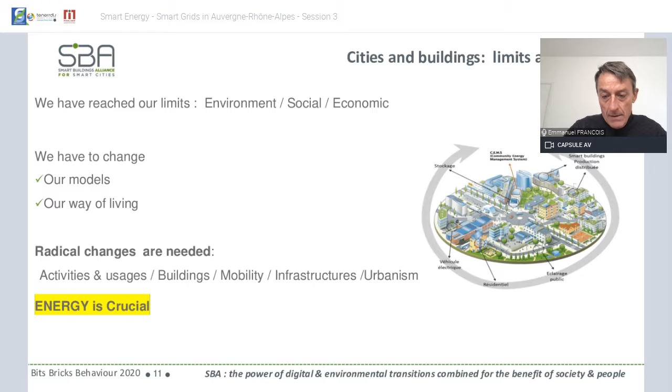In this context, digital is very important and is an opportunity. We are noticing that more and more we are going to a hyper-connected world, where every citizen, every building, every mobility, every territory, equipment, infrastructure are connected. But not only connected - interacting with each other in real time. That's the most important thing, this qualification of real time.

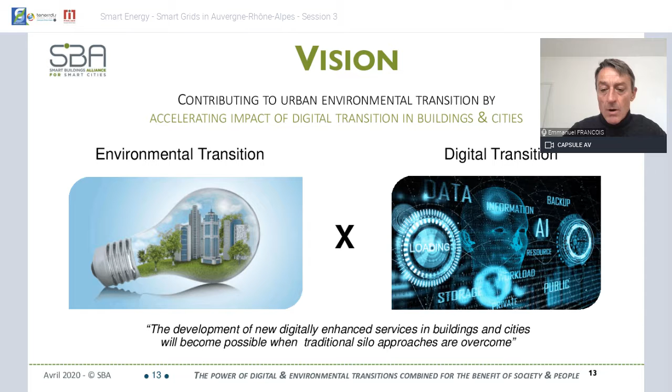Our vision is to support this digital transition and environmental transition. Therefore, we founded SBA as a think tank and also as a do tank. Today, this organization, I would say, is almost unique in the world for its transversality, and groups around 500 members in France. Within these 500 members, already 10% are non-resident in France, so that means our ideas, what we are doing, is going abroad our borders. We group cities, architects, installers, equipment providers, telecom, IT, financial industry, industrial players.

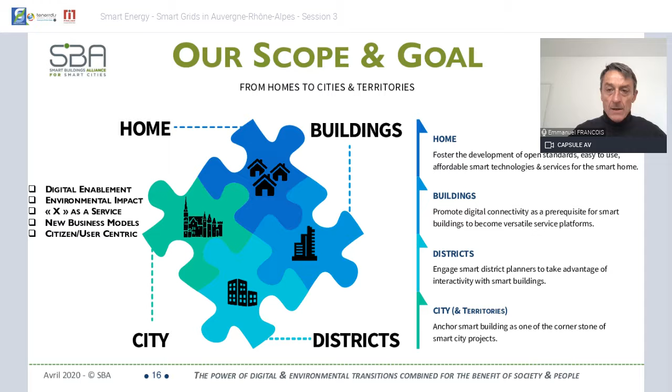So all these players are sitting together to rethink the building and the city of tomorrow. Our scope concerns not only homes and buildings, but also districts and cities, and how everything is interacting together, and how we can rethink a better world by rethinking the buildings and the cities.

To support this transition, we have a strong organization with three vice presidents - one for smart city, one for smart building, one for smart home - and general secretaries, and also a management office and a board of directors. Some attendants today are also members of this board of directors, such as Frank Fischer.

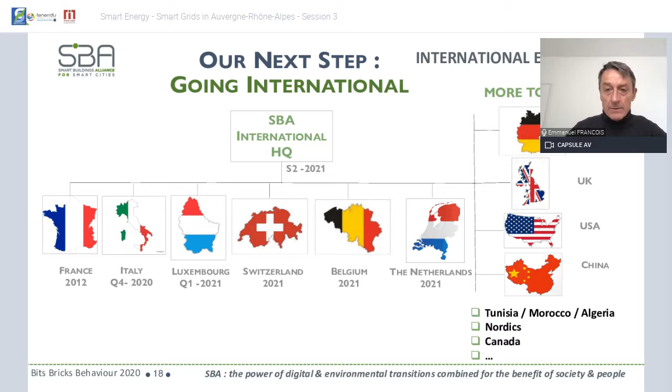Our next step for the coming years, starting this year, is to develop SBA internationally. SBA is a non-profit organization with a unique common interest target. We think it can be interesting to exchange with other countries and to set up independent SBA chapters in every country, and then eventually create an SBA International, sovereign of every smart building initiative, even in France, which will group the thoughts coming from every country and support the framework we worked on, which could become a universal framework for smart buildings and smart cities.

This is our thought. So what are the main works of SBA? First, just to recall, we wrote 10 recommendations, smart and green, last year for all the players and stakeholders, on how to make a smart building, how to make a smart city, how to start, and which recommendations to follow. It's very simple, but that's what we did, and it's available in French and English.

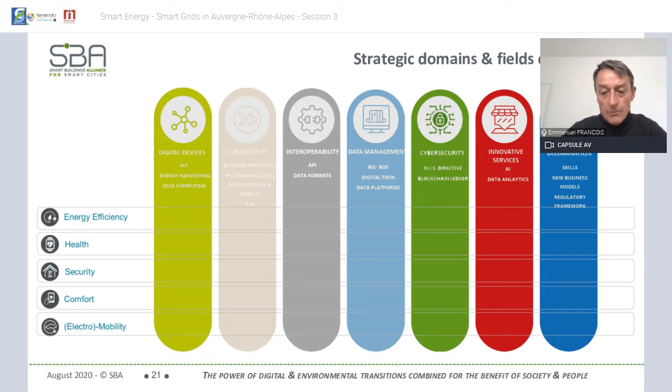Beyond that, the works and goals of SBA deal with energy efficiency, health, security, comfort, and electromobility. For all these fields, we deal with digital devices, connectivity, interoperability, data management, cybersecurity, innovative services, and dissemination — how we can train all the people and stakeholders to support this mutation, this transition, which I call a civilization transition. For this, we have set up working groups and commissions, first working on the reference framework.

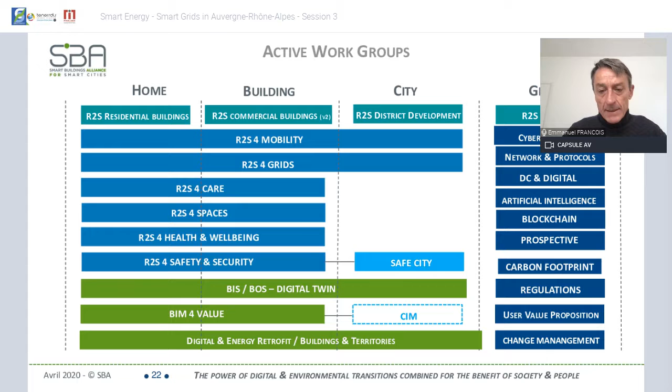The most important is Ready to Services, which we'll talk about later. We also work on the digital twin of buildings and cities, the operating system of the smart building and smart city. Also, how we can retrofit existing buildings and territories by bringing in digital elements, and transversal commissions such as cybersecurity, networks, DC and digital, artificial intelligence, blockchain, prospective studies, carbon footprint of digital, and regulation — because it's very important that the law supports this mutation and adapts itself, that regulations adapt themselves, along with user value proposition and change management.

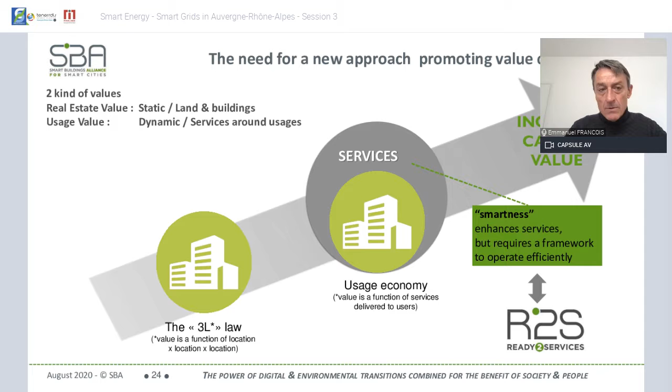As I told you, we are at the origin of a reference framework called Ready to Services, R2S. Why Ready to Service? Because we mean that with smart, with digital, there is a new value to consider in the building and also in the territories — this is a usage value. Beside the real estate value, which is static and concerns lands and buildings, you have a usage value, very dynamic, linked to the ability of the building and territories to deliver new services around usages. This means a new economy to adapt, and it means we need to rethink the rules and regulations around these dynamic usages, and how to consider and evaluate this value.

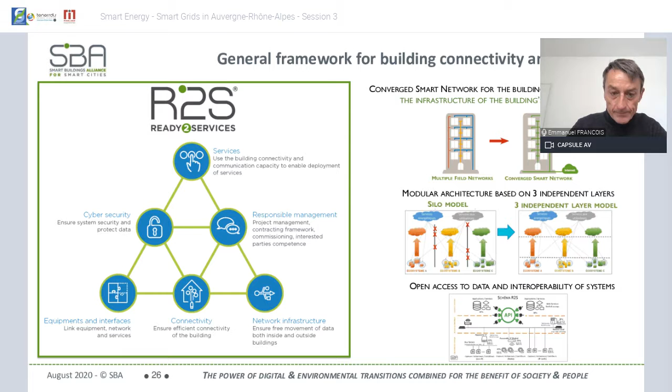This Ready to Service framework is now also supported by Ready to Service R2S Connect, where we describe, as I said, the APIs.

Just for your understanding, because maybe it's a little abstract, take into consideration a residential building. Today you have your own internet access, contracting with a telecom operator. That's what we respect. But now there is a new network, a network of the building, the digital IP network of the building, and this is independent of your network.

This network supports all the applications concerning the building and residential homes for crucial applications such as energy, water, gas, security, and assisted living. This belongs to the building, so you can pool all the consumption of the building in terms of water and energy, also collect the data of all users, and integrate the building into a smart district, which you cannot do if you have separate housing with separate data and separate operators.

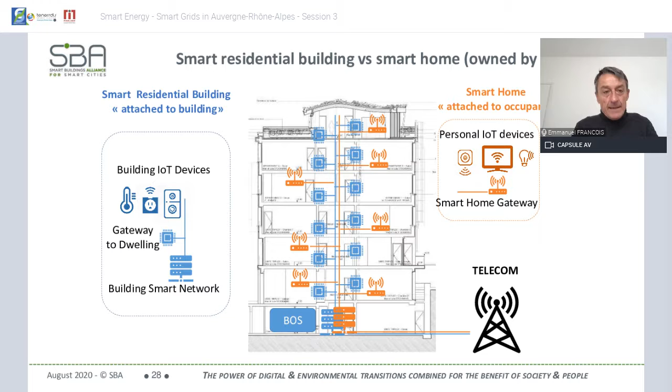So what I'm saying here is quite important and also quite disruptive. But today, as I mentioned, we already have 500 members who are supporting this mutation, and we said yes, we have to do it. Now let's do it together.

Ready to Service concerns not only residential buildings, but also commercial buildings and district development. This is, as I said, a reference framework to be applied at every scale. I would say this is a digital trust framework. And of course it exists, but it can always be improved.

At this occasion, we are already working on a V2, which will be launched this year. That's the reason why we want to share today and tomorrow with you, with other countries, in order to improve this framework so that we can be as efficient and secure as possible, so that the management of the data becomes more and more secured, and so as to ensure trust, not only for the players, but also for the users.

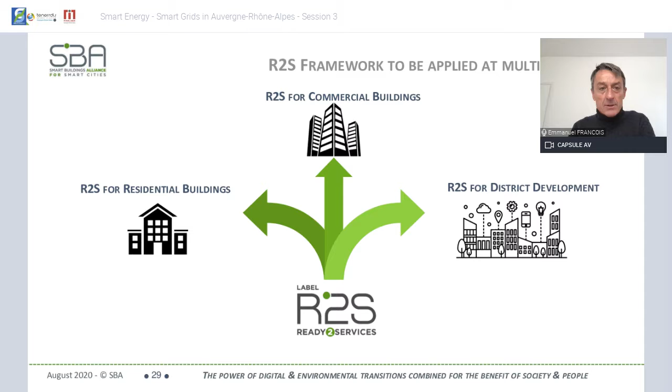When I say services, this is why we say Ready to Service, because there are services. And these services exist. Today we have listed several services which are key for the building, key for territories. We started with energy services, and for this reason we launched last year Ready to Service for Grids.

This is a declination of the Ready to Service framework, which concerns especially the data concerning energy and how a building inserts itself in a smart grid. Very soon we will launch R2S for mobility for the energy part, to describe how an electrical vehicle can connect itself to a smart building and how we can manage the charging point.

But we are also working on R2S for spaces, for optimization of spaces. That means a space in a building has to be mutualized, pooled within all the buildings and also within a district. The same for safety, health, assisted living, personal care. And also recently we will work on signage and user well-being, and so on.

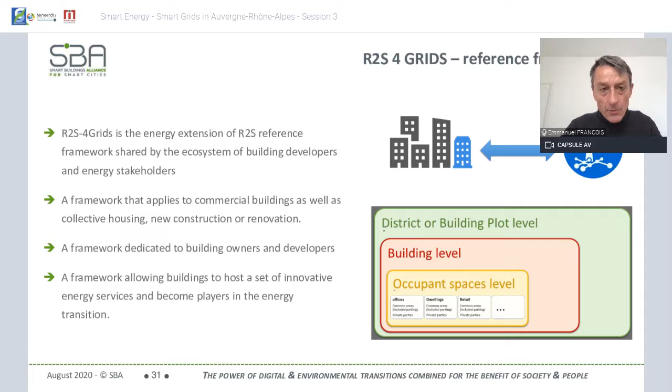So, Ready to Service for Grids. I will switch very rapidly, but what is important is we have described three levels of the building. The first level is how the building is connected and shares data with its environment and how we receive the consumption information. The second is how a building is reliable, meaning how the energy production and consumption data are reliable and stick to objectives. The third is active buildings, meaning how this building interacts with a smart district, with a smart grid.

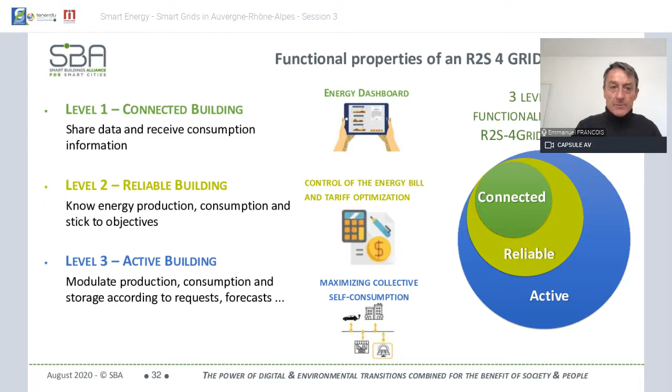Recently, as I told you, we will launch ready-to-service for mobility. This goes the same way with data management, cybersecurity, and quality management system.

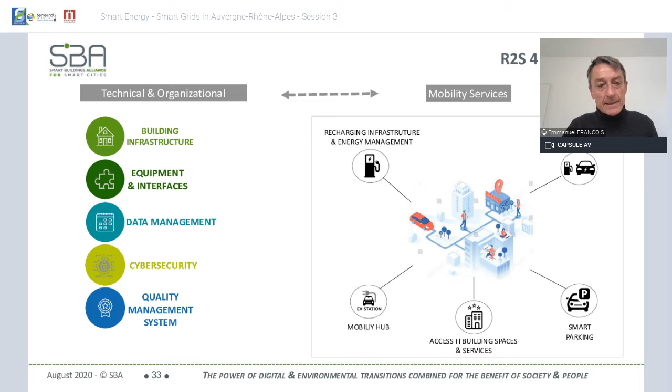And what is quite important, we are launching a new concept, which is EV score, electrical vehicle score. That means how a smart building can integrate the electrical vehicle and be able to manage the charging of this vehicle. So just as description, we have A, which means how this building can adapt and accept vehicle to grid, meaning how the electrical vehicles become a real component of the smart grids.

But already with B, it's very interesting. That means how a smart building can monitor systems connected to network and how we can adjust the electrical consumption of the electrical vehicle to the global needs of the building.

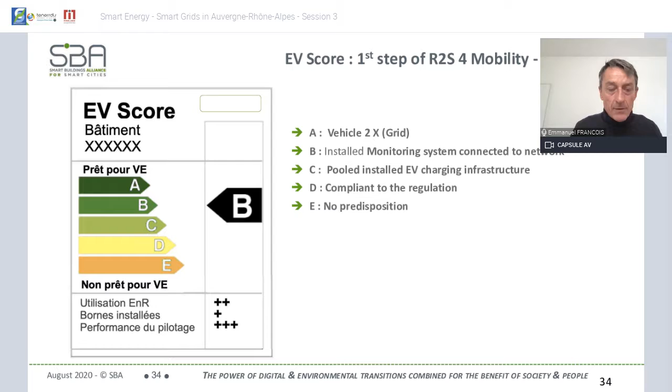Which is quite important, and our target is at the end to describe the digital twin with convergence between the static data of the building and the dynamic data of the building, to have a global overview in real time of the building and the district for all the services.

I will sweep very quickly, but this was also a topic I wanted to highlight because the topic of today is energy, and I have the conviction that we need to go to hybrid networks for every network, and I would say more hybrid equipment, hybrid building. So let's start with networks.

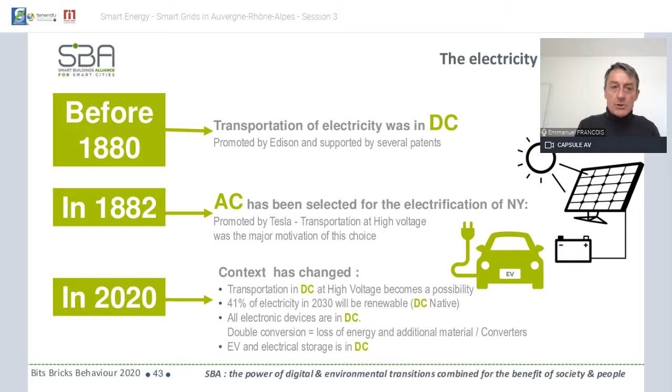And if we want to answer the current challenges in terms of climate, in terms of GES, I think switching to DC is not a utopia. It's just a need, and we need to have it in plan for the next 10 years.

And as you see, hybrid AC-DC electrical networks is already a concept emerging in the heads of several countries, in the head of several universities, as in Netherlands, the University of Delft. But what I think, and I spoke about it to the European Commission, is that it's time now to have a European plan for how we can progressively switch to DC - that means to have a hybrid AC-DC electrical distribution, especially with digitalization.

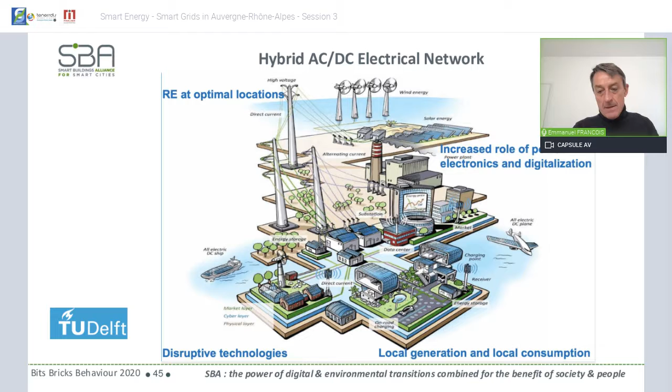That means as we are deploying digital in every building and every territory, at the same time we need to deploy also this DC network. So that's my vision I wanted to share at this occasion, and I hope you will receive it positively.

And just to highlight it, my vision is not only energy but also water. As you know, today there is a huge problem with water, and in the next 10 years we will have everywhere in Europe problems with water. And as you know, only 10% of the water we are using is for drinking, we need to also rethink the water networks and have a hybrid network - one for water we drink and another one for usage water. And the same also for waste.

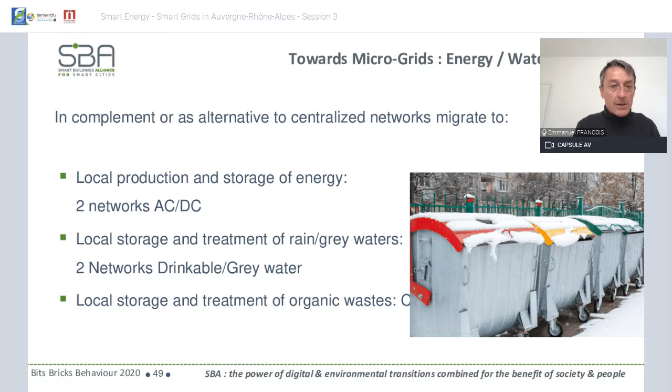We need to have a local store and a local treatment of some wastes. So I think this is a new way of living, and we can provide this just because we are sharing data, and this data we are collecting locally, and then we have a local governance of these hybrid networks we can manage locally for more efficiency. This is a vision I wanted to share with you, and now I would like to answer your questions very rapidly. But this vision is just to move to more sustainable territories, with more diversity, more proximity, and more frugality. Thank you.

Thank you, Emmanuel, for your presentation, which went from electrical network to a much broader range of topics, including water and waste. I see that you are looking at all the aspects of a smart city, not only energy.

We had one question in the chat: Is the reference architecture documentation available? Yes. Maybe you can send a link to where people can access this information, I guess on your website? Yes, on our website, and also on the website for smart building. You can find it also on the website of Certivea. If you can write it on the chat later. Yes, I will do it, no problem.

Okay, another question from Frédéric Lux: Which services are you offering your members? Our members, the services, yeah, the 500 members you mentioned, I guess.

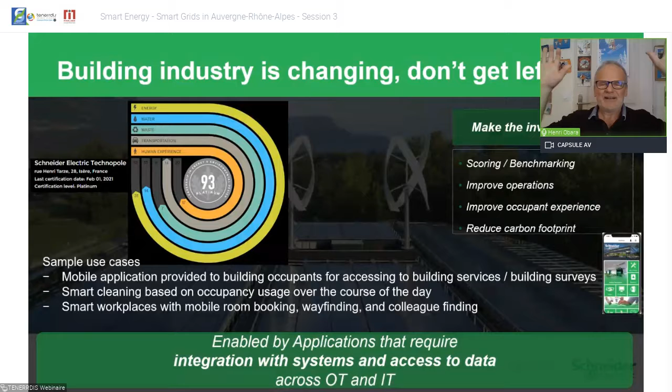More specifically nowadays with COVID, but in normal situations we still spend 90% of our time in that building. Whoops, not so quickly please Quentin, can you go back to the previous slide? Yes, thank you.

So what we call today within Schneider building of the future is that we have the vision of an all digital and all electrical world, and this will be applied to our building offers and solutions. This is enabled today thanks to the convergence and integration, as mentioned many times by Emmanuel, between IT and OT. Next slide please, now.

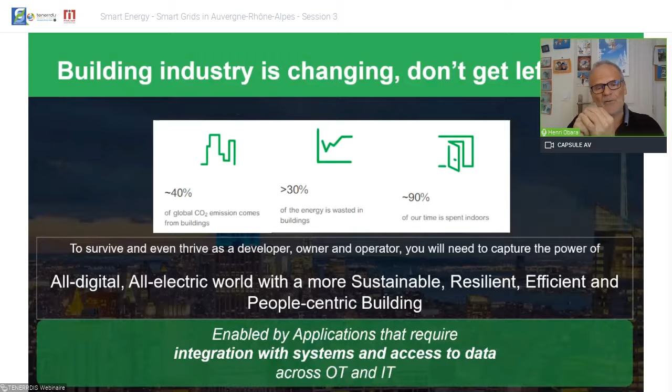What can we think and how can we do that? We learned many things today from Emmanuel's presentation about electrification, DCs that are coming up and showing up, but also when buildings are in fact constructed and start the operation phase. That's where the effort must be sustained to reduce the impact. How can we do that?

We do that by managing energy, of course that's the premium impact of a building's consumption. But not only energy - buildings consume water and generate waste. And also, to go to the building, and that's another dimension of a building, transportation shall be addressed. Also together with city planners and city transportation organizations, we should think of new ways of mobility.

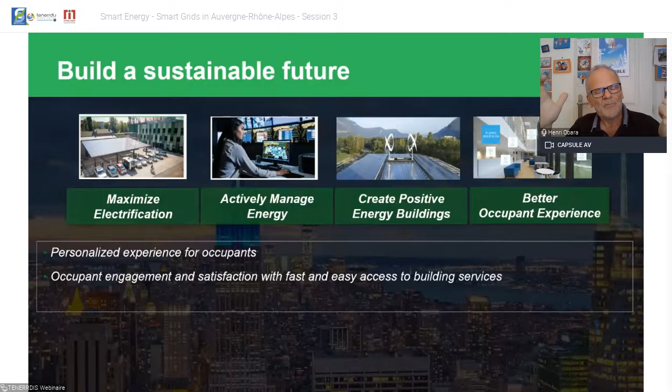So today we will address all of these topics in one single vision, and I guess some of you know what I'll be referring to as what could be the result of a smart building - that means how can we make building efficiency and building environmental performance visible. Please, the next slide.

This is one of the ways we chose for at least our two buildings in Grenoble - we'll see those buildings later on. On the left side of the slide you see a kind of racetrack, as the Americans call it. This was the accomplishment of Schneider Technopole building, which is not far from the Tenerrdis location. What you see is that the building achieved a very high level of performance according to this well-known international rating system, which is LEED.

What's that meaning around? Not only did we make the building's data visible and accessible, but also we can demonstrate, benchmark, score, and improve the whole building portfolio worldwide, and rank that building according to a rating system. We chose the LEED approach because to date these are the only ones that allow and provide a scoring function based on data sharing. And this is the story I'll be telling you in detail later on.

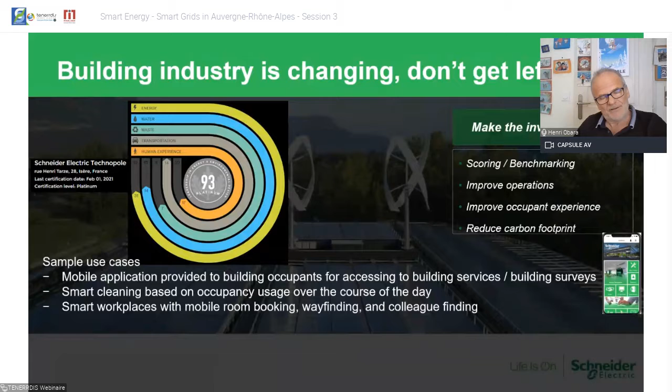Next slide please. That's the Technopole building, as you can discover it when you come to Grenoble by train - you'll be able to identify it very easily. It's showing its PV facade, which might be quite a strange way to install PV, because PV on the facade isn't that efficient.

But still, these two facades - the south facade and the southwest facade - you might imagine are not producing that much energy, and you'd be right. It's more an architectural touch around the building. But still, these facades generate a small share of the energy consumed by that building.

So what was the achievement? What was the project about? How did we start that? We started, since we were the owner of these buildings - Technopole campus is a set of different buildings - we started a project from scratch, located on this campus where there was demolition ongoing to prepare the field for constructing these two buildings, the lab part and the office part.

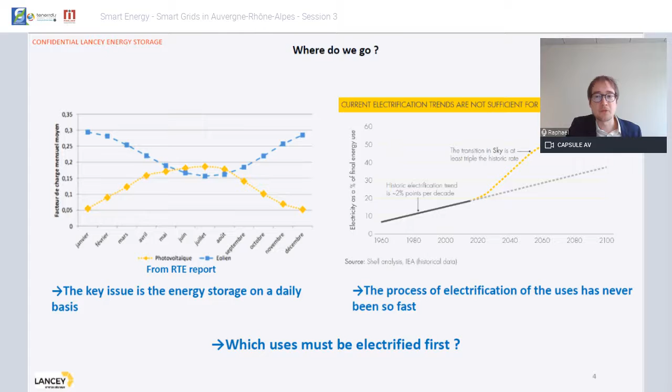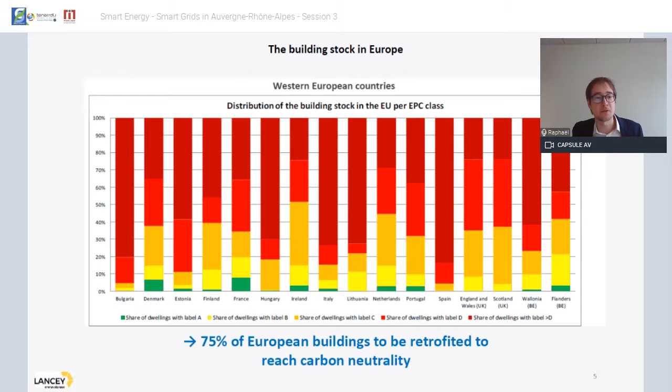So that shows you a bit the scale of the retrofit to be led in the coming decades in Europe, to put those dwellings in the right category. France actually is not that bad in terms of label A, we're actually number one or number two in Europe. But the problem is not the new buildings, the problem is really the retrofit. You can probably imagine thousands of billions of euros to be invested into those retrofit operations, and the key aspect will be about user acceptance.

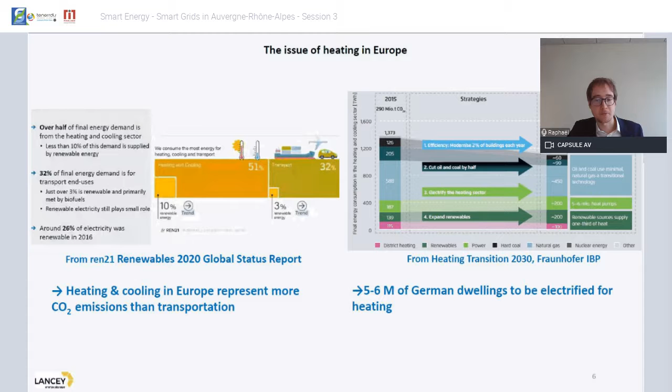So probably at this stage you know my point: we have to electrify the heating, and we have to do it in a way that creates resilience for the end users. We have this yellow jacket effect that's pretty well known right now - if you don't provide the right transitions and the possibility for people to adapt to change, for instance regulation regarding carbon taxes, that was the initiation of the yellow jacket process. You can imagine plenty of those bad side effects where people will prefer to refuse or even deny the change rather than follow the move. So it's not easy at all, of course not.

But it means we have to consider, we have to have in mind different kinds of options to adapt to the wide varieties of those buildings to be retrofitted in Europe. And at Lancey, we have developed a product that, in our mind, can be very, very performing for at least one part of the use cases of individual dwellings to be retrofitted.

You have only 5 minutes left, Raphael. Wow, okay, I will accelerate a bit. Sorry for that, too long for the introduction.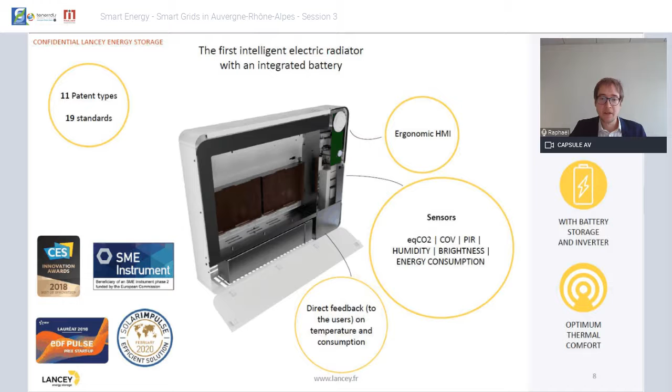What we imagine with this product is that kind of configuration. So it's not only the Lancey Capella, our heating system alone - it's infrastructure, a complete solution with different of those systems, with a link to the smart meter that we've been working on since 2018 directly with Tenerrdis, and of course the PV photovoltaics installation on the rooftop or in the neighborhood.

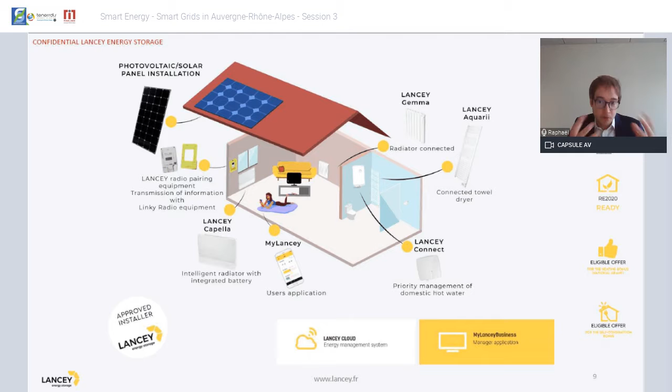Imagining the same single solution in self-consumption, with as much as possible local production and local consumption through the storage capacity of our devices, with a view to having it run efficiently to reduce the heating bill first, to create more resiliency for the end users, to reduce carbon emissions, and to open new kinds of services like grid services, demand response, frequency containment reserve. I will come back on that.

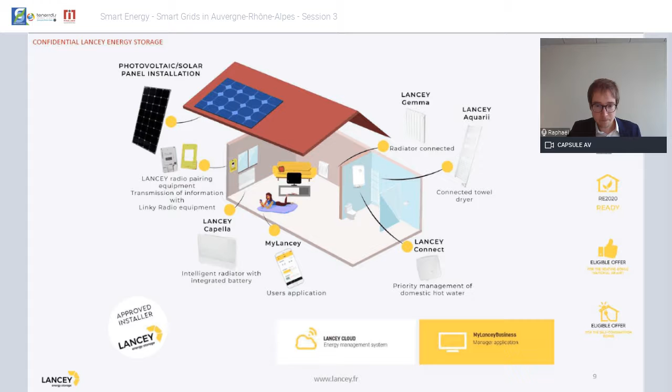We have developed the full package of application. You have the front-end part with the end-user app, but you also have a back-end part which deals with model predictive control on different aspects. The idea is to have the opportunity of treating different layers of constraints, some coming directly from the house, from the end user, in order to fulfill the level of comfort, for instance.

But some constraints can be completely external to the dwellings, like the constraints from the grid, the weather forecast, the availability of renewables in the coming hours or days, the CO2 emissions, and why not, in the near future, some constraints coming from an energy community with other sources of production and consumption.

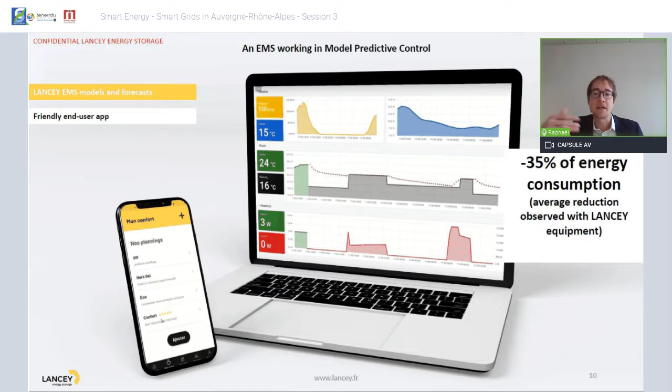The main part at day one is to be very efficient regarding the heating generation, which is a main source of CO2 emissions and of the heating bill at the end of the day. But that also makes a system that can be adapted over the years to changes of regulation and to more and more complexity, and that's the end goal part of the smart grid.

One thing to have in mind regarding the Lancey approach to storage, which of course can be duplicated to other kinds of uses, is the fact that normally in a traditional storage system you have the battery pack itself, but also different parts around it which we call the balance of plant. A battery by itself is DC, low voltage, you can't do much with that directly. You have to use an inverter to control temperature, to make an energy and battery management system, etc.

That costs quite a lot, actually up to 50% of the total cost of storage. And that's even more the case considering a behind-the-meter approach, like Lancey is. If you embed the battery directly into the final use, you reduce those associated costs with the storage.

And typically, you can find the same kind of advantages with the electric vehicle to grid approach, and that can be interesting to reduce the levelized cost of storage. That's clearly one advantage of the Lancey approach.

One other advantage of this approach is the fact that, considering rather small batteries, we can consider different kinds of sources to imagine a second life of batteries quite easily. As an example, we are working with the largest fleet of e-bikes in rental services around Paris, Véligo Location - it's 20,500 bikes. Lancey is collecting the batteries after their first life in the bike.

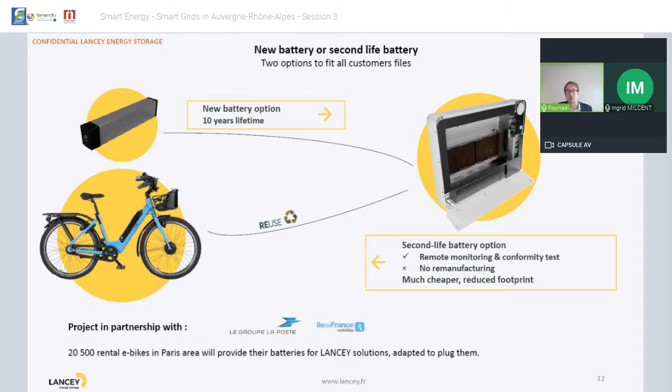After some tests, we select the best of them to find a second life, without remanufacturing, into stationary use. That's also an interesting contribution we can provide as stationary storage solutions to support circular approaches, and part of the solution to the issues that batteries, like many renewables, can have - the raw materials consumption and all those rare materials we have to use for the moment.

Sorry, Raphael, can you wrap up please? Yes, that's my final slide, and then I'm finished. Sorry for that.

Clearly, what we want to participate in and are looking for partners to collaborate with is imagining the step further, where we can go above the single house or single flat, onto a larger scale - like a group of dwellings, a group of buildings in a collective self-consumption configuration, or an energy community - imagining that we can create additional resilience and additional value to local production of electricity with more sources and more possibilities of consumption on site, and how it can be both profitable, scalable, and carbon neutral.

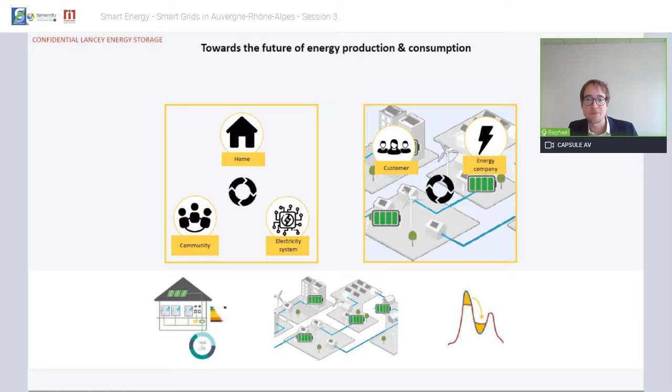And clearly, if you, dear audience, have some interest in joining our conversation, you're most welcome. Thanks a lot, I was a bit too long, sorry for that. Don't know if you have some questions.

Thank you, Raphael. There was indeed one question in the chat, so we will show it now.

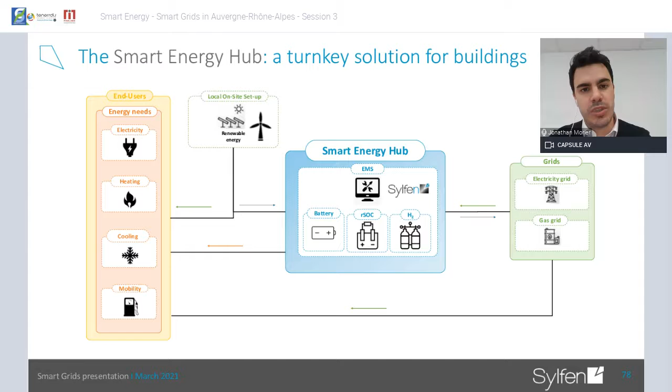As I mentioned, the heart of the Smart Energy Hub is this reversible solid oxide cell. For those who don't know, it is basically a 2-in-1 electrolyzer and fuel cell. So those are two different modes.

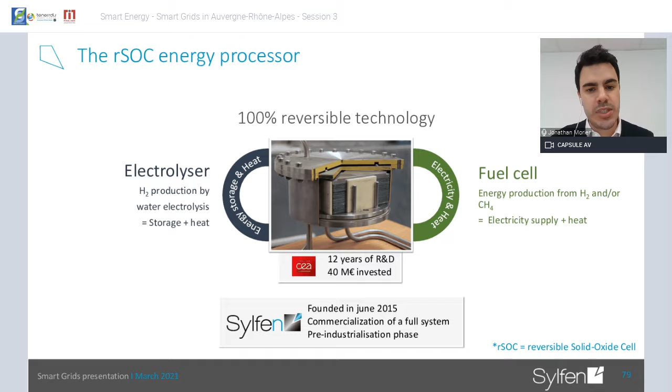Whenever the hub is in electrolyzer mode, it will absorb the surplus electricity that is being produced and convert that into the production of hydrogen. In the other way, whenever it is in fuel cell mode, we have the consumption of that hydrogen that has been produced, and that is being converted into electricity and heat. The idea is to provide that energy back to the building.

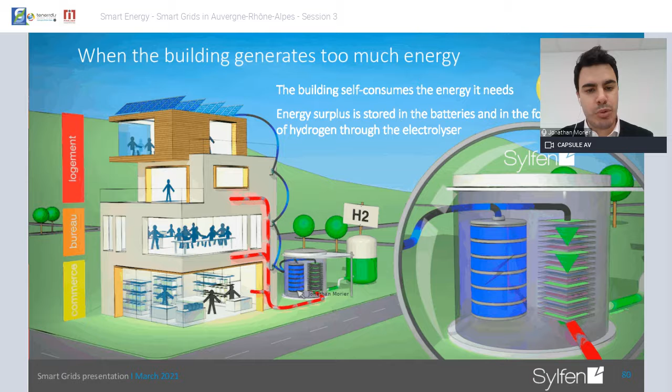In a nutshell, in a diagram, you have a building which has some source of renewable energy production. The solar panels will provide much of the electricity for the building, and whatever is not consumed right away will go into this Smart Energy Hub, which is made up of the batteries we represented in blue, and then that energy processor in green.

That's whenever during the day, whenever there is surplus and whenever there is not enough energy, that Smart Energy Hub will give back that energy in the form of electricity and heat.

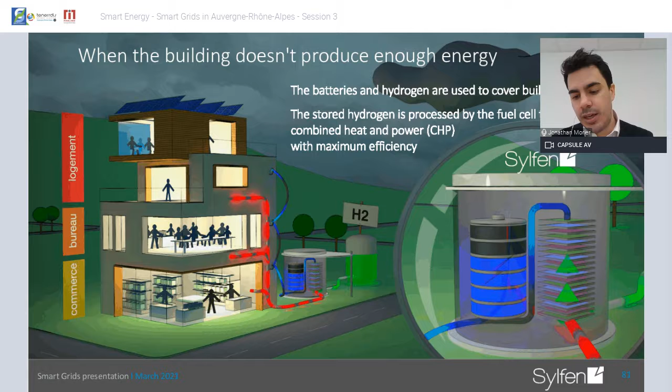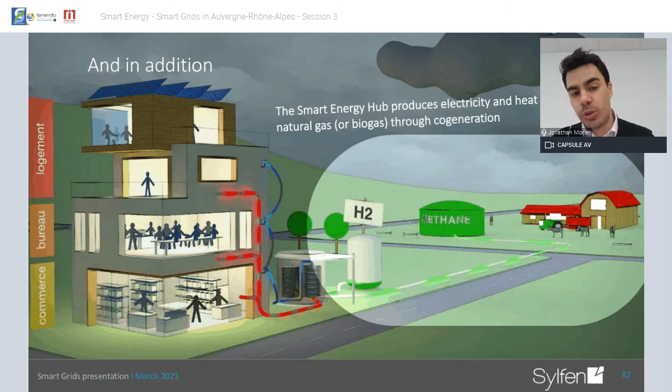One of the particularities of our technology is that whenever the stocks of hydrogen are completely depleted, we always have the possibility of running our Smart Energy Hub as a fuel cell and cogeneration using natural gas. If we can use biogas, that's even better because we obviously reduce the emissions. But the point here is that we are able to increase flexibility whenever there is not enough solar production, for example, to produce enough hydrogen.

On the hydrogen side, the electrolyzer that we use, so the 2-in-1 electrolyzer and fuel cell, whenever it's in electrolyzer mode, it can absorb up to 40 kilowatts per module, and that will produce 800 grams of hydrogen per hour. Whenever it's in fuel cell mode, it will deliver to the building 6 kilowatts per module of electrical power and 4 kilowatts of thermal power.

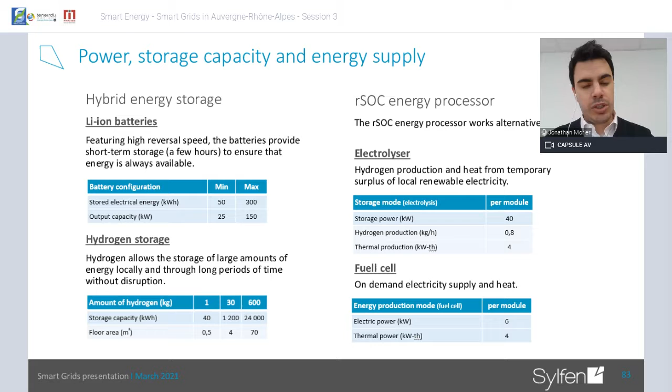So again, we're a multi-energy solution providing electricity, heat, and hydrogen as well, if we're going to explore the hydrogen mobility at a later time, and we're starting to on some projects.

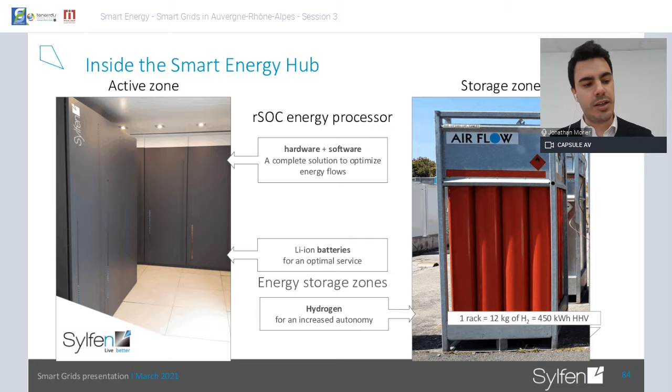This is what it looks like. We have two zones. One zone is the active zone, which comprises the hardware and the software that's usually installed in boiler rooms within the actual building. Then we have the storage of the hydrogen, which looks like these B50 bottles within racks. That's, again, completely customizable. That sits outside the building for security purposes.

We're targeting all types of buildings. Today, our product offering is really focused on buildings that are 1,000 to 10,000 square meters, whether they're existing buildings or new buildings.

Given the nature of our innovative solution, most of our projects are new buildings, but there is definitely the possibility to work on existing buildings. There just needs to be enough space to install our solution, which can be a few square meters within a boiler room. We are working at the same time on a new line of product, which will be 10 times more powerful, looking at 400 kilowatts of absorption in electrolyzer mode and delivering 50 kilowatts in fuel cell mode.

And that's more geared towards bigger campuses such as universities, hospitals, industrial parks, etc. A quick overview: Sylfen is a startup that started in Grenoble in 2015. Today, there's about 18 or 19 of us. These are the three co-founders, and we're working on several projects.

Just a quick three of them: one is where we are located, and two others are in Italy, one in Turin and one in Procida, which is a small island off the coast of Naples. I'll talk a little bit more about that one.

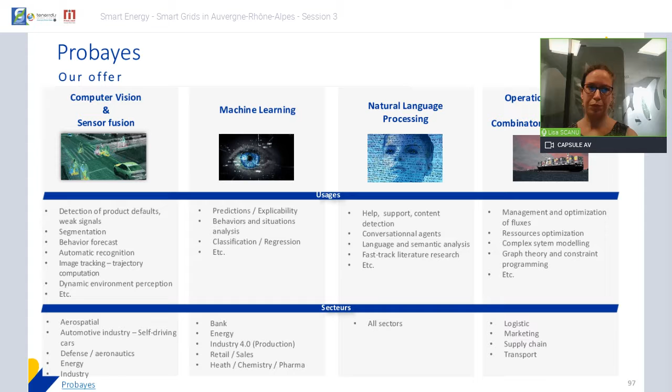Our expertise is based in 4 different areas. The first one is computer vision and sensor fusion, mainly used in automotive industry and self-driving cars. We also have an expertise in conventional machine learning, which can be applied in many different areas, such as bank, energy, industry, etc. We have a team expert in natural language processing, working amongst other things on chatbots. And finally, we have a team specialized in operational research and combinatorial optimization, which mainly intervenes in logistics and supply chain. But today, I will be talking about Bâtissance, which is a product to optimize the energy consumption of buildings, and which is based on the 4 areas of expertise I mentioned before.

Bâtissance is a tool to automatically model the building, taking into account the weather forecast in order to optimize the heating and cooling of the building. It goes until the remote control of the energy equipment.

Before its commercialization in 2013, we worked 3 years of internal research and development on this product. We have 2 patents, one on the automatic learning of the model and one on the forecast of external gains. And it received several labels and awards, such as the label Energized by Tenerrdis and more recently the Solar Impulse Efficient Solution label.

The main competitive advantage of our solution is that it is a non-intrusive solution adapted to existing buildings. It can, of course, take into account the external gains, but more importantly, it can automatically control the energy equipment in order to increase occupant comfort and decrease energy consumption.

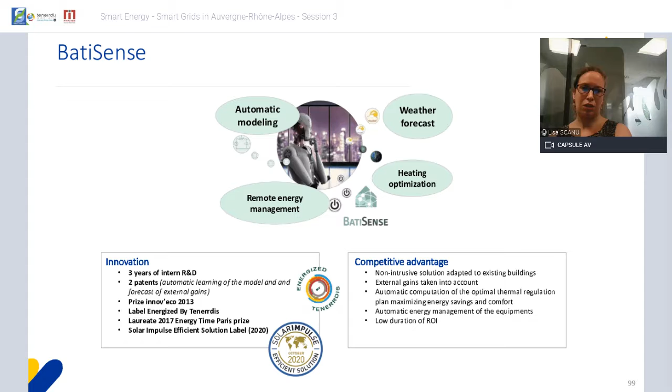Currently, the solution is mainly used for the building itself. The main need from the clients we receive is either to minimize the amount of energy required or to minimize the financial cost of energy consumption.

But I strongly believe that a big advantage of our solution is that we can act on the definition of a cost function in order to take into account many different phenomena. And it can be a huge asset for a smart grid, since we can integrate power capping constraints or integration of storage in order to optimize auto-consumption, for example.

We can also take into account several specificities of the energy market in order to add some revenues for the clients. So it is really easy in this product to change this cost function and to make the building an asset.

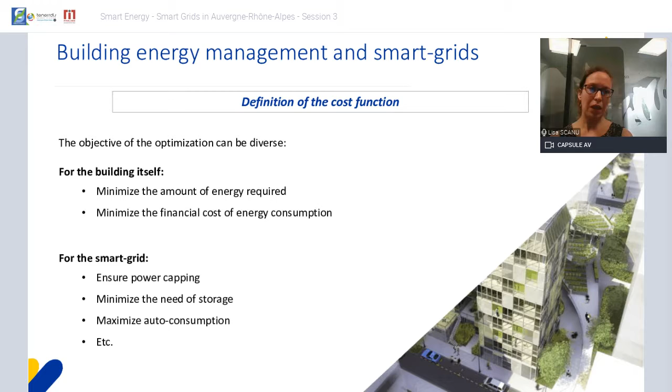How does it work? The first step will be to model and calibrate our model. So we will divide the building into different thermal zones, and for each of these zones, we will apply a simplified model, which is an analogy of an electric circuit.

Each of these zones will be equipped with sensors. It's really simple sensors such as indoor temperature or energy consumption sensors. For the first month, the only thing will be collecting data.

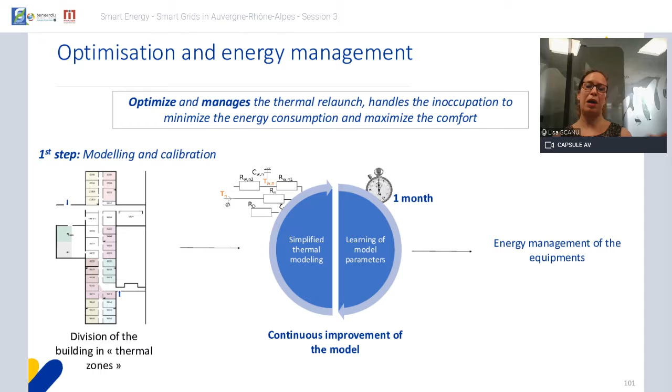After 1 month, we have enough data to learn the parameters of our model. And then we can go to the energy management part. So this is the second step. Our client will only give us information about its occupancy agenda.

Then we will still have our sensors on site. We will continue to collect data. And if we want to introduce in our objective functions some information about financial energy contracts or the energy market, we will need to have that information.

All this information will go first into the thermal behavior forecast, which we just calibrated. And then we also have another brick, which is called weather forecast. In this brick, we won't do the weather forecast itself, but we will collect it, and then we will kind of locate it on this building.

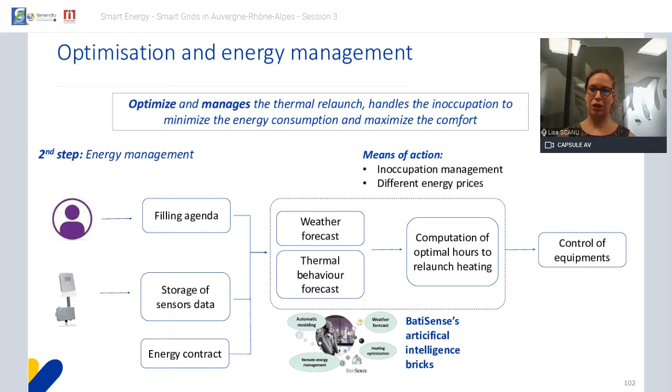By a second learning phase, we adapt the weather forecasts to a building thanks to exterior temperature and the thermal behavior of the building. When we have calibrated everything, we are able to compute the optimal hours to relaunch the heating systems and to control the equipment.

Of course, our solution is aimed to be autonomous, but we couldn't install sensors on buildings without giving our clients some way to visualize the data we were collecting. So we developed a simple data visualization web application where we can find the different data we collect on site, so indoor temperature, exterior temperature, power, heating power or cooling power, the agenda and the presence if applicable.

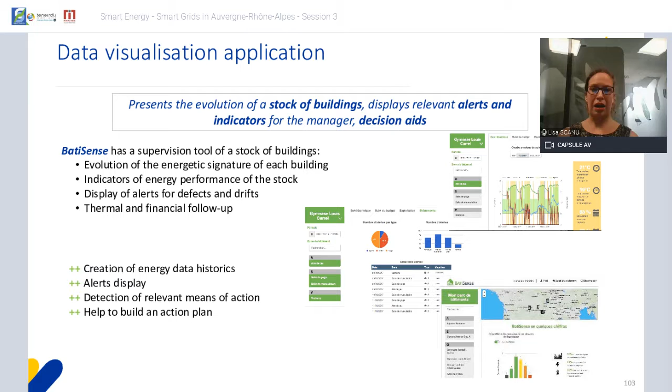Then we also have different information about various alerts or indicators to give a quick display of the state of the building. Then I will just give two quick illustrations of some results we got with this product.

The first one is our historic client, the city of Seyssinet-Pariset, which is a small city around Grenoble, but which had since 2005 already high objectives in energy savings and CO2 emissions. But they didn't have a lot of financial and human resources, so they needed to pursue the approach and increase the gains without heavy investments.

For us, it was easy in the way that the users and inhabitants were made aware and the city engagement was really high. But on the opposite, the problem was that there were old buildings with no instrumentation at all, and even the occupation agenda of buildings was only partially known.

But we first installed our solution on two buildings, a sport hall and a school. For the first year, we had a very high return on investment because we had like 40% of energy savings for the sport hall.

But those are the results 4 years later because our solutions allowed us to identify several problems that could have been replaced and corrected. On the long term, we had around 15 to 30% of energy savings each year. And now we have 6 buildings in this city equipped with our solutions.

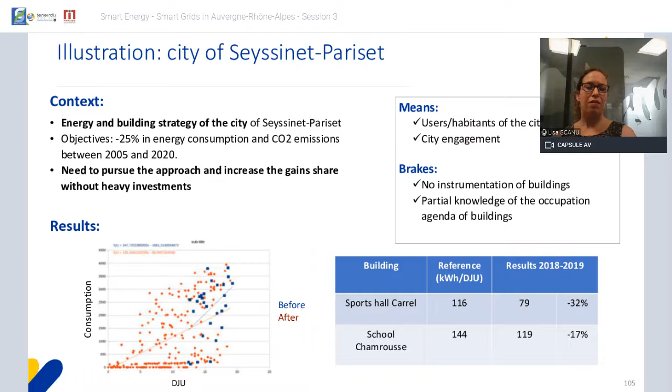For none of these buildings are we under 10% of energy savings each year. The other example I like to give is the Woopa building. It's very different from the buildings equipped in Seyssinet-Pariset because it's a really recent building, built in 2013 if I'm not mistaken, and conceived and occupied by building thermal engineers. The objective was to be an energy positive building, but the problem was they had installed an active slab with a lot of inertia, and the building had a lot of windows, so it was very sensitive to solar gains.

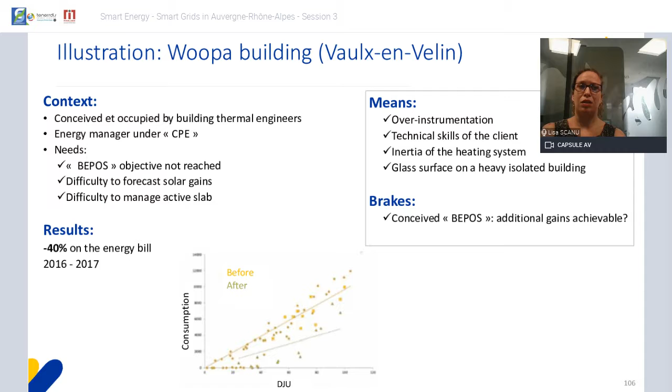The energy manager on site didn't succeed in balancing these two aspects. For us, it was really easy to install a solution because the building was already instrumented. We didn't add any sensors because everything was already here. We were skeptical about the profit we could make because we were used to old buildings, but on the first year of installation, we reached 40% savings on the energy bill. More importantly, we increased the thermal comfort of the occupants a lot.

To conclude, I will give some updates on the current state of development of our product. From a technical point of view, the product has been commercialized since 2013. We have different returns of experience, and we reach 15 to 40% of energy savings on all the buildings equipped.

From a commercial point of view, though, the next step is scaling up. Probayes is not intended to commercialize itself applications which require such scaling up in a specific field. We really want to keep a wide view on different sectors and different technologies of artificial intelligence. That's why we are looking for a partner, such as facility management companies or others, to help us in the commercialization of BatiSense.

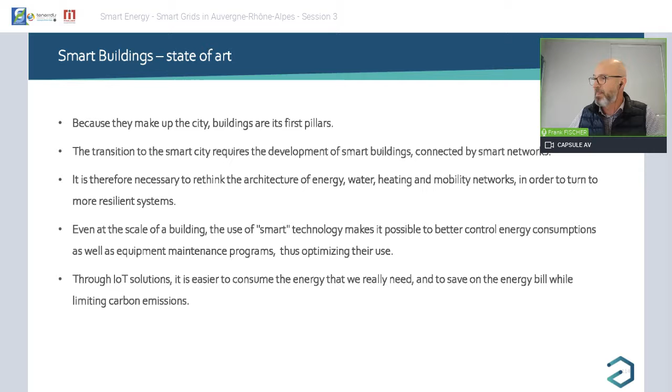As you may know, the big challenge of our century is to decrease fossil energy use and increase renewable energies within the framework of climate constraints. Smart buildings connected to smart grids can significantly contribute to these objectives. As I told you, buildings are the biggest consumer of energy in the electrical grid and could be among the greatest producers of renewable energy, especially thanks to the concept of energy positive buildings, while offering at the same time high flexibility in energy demand.

In addition, the European regulatory and normative framework is becoming more and more coercive and requires rapid, effective action with a real return on investment. So I'd like to show you some examples of what can be done in a smart building. Our solution allows us to optimize the energy performance and maintenance of buildings while improving the comfort of occupants.

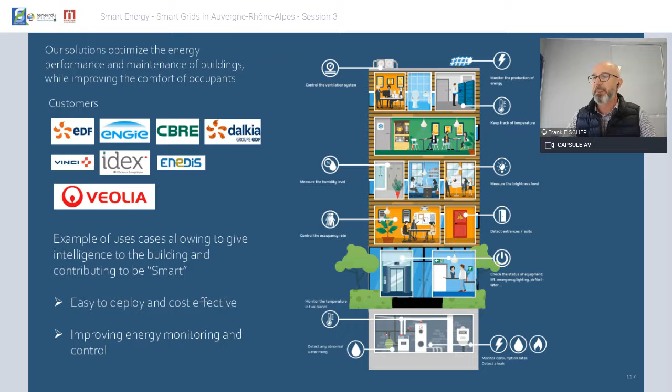If we are talking about the value chain, Adeunis is focused on the beginning of the value chain. We manufacture sensors, we run connectivity through public or private networks, and we ensure secure and reliable data to our customers and partners, which can be facility managers, social landlords, property managers, and city managers. We have thousands of use cases deployed with our customers, especially in buildings.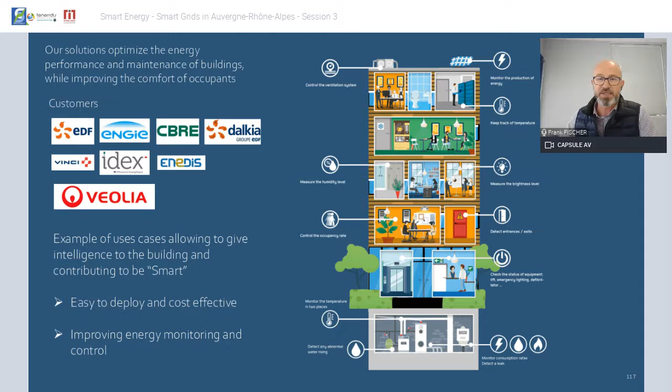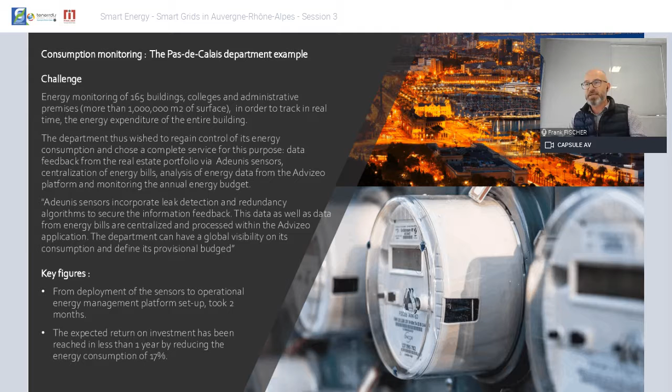But I have chosen two of these use cases to illustrate what can be done through IoT solutions. The first use case is energy consumption monitoring. Our customer in this case is the Pas-de-Calais department, located in the north of France. The challenge was simple: the Pas-de-Calais department must remotely read the consumption of 165 administrative buildings and colleges under its supervision. It's a project of very big and considerable scale, representing more than 1 million square meters of surface area to be equipped.

The department wished to regain control of its energy consumption and chose a complete service for this purpose: data feedback from the real estate portfolio with Adeunis sensors, centralization of energy bills, and analysis of energy data. We ran this use case with one of our partners, Advizeo, which runs a platform for monitoring energy. The solution has been deployed to collect energy data from all 165 buildings.

And it was including, of course, IoT sensors and the main platform from Advizeo. So if we focus on the key figures of this development, one of the main interests of the IoT solution is the time from deployment of the sensor to operational energy management platform. It took only 2 months to deploy because it's not intrusive. We don't have to install everything by running the existing system. We just have to deploy a very simple system based on a wireless solution, mixing public and private networks in this case.

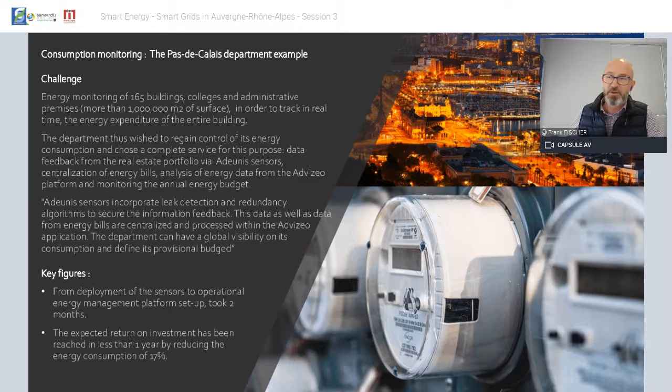And now we are working with the department on other subjects such as air quality and maintenance of equipment in the building. The second use case I would like to show you is focused on solar panel monitoring. It has been done with another of our partners, Tecsol, and the objective was to detect in real time a failure with thermal or photovoltaic installations in order to optimize the production of solar energy and then, of course, reduce the amount of consumption.

As you may know, whether it's thermal or photovoltaic, solar energy is on the rise. Its use continues to increase over the years. And just to give you an example, the increase of photovoltaic production has been 11% between 2008 and 2019, and my guess is that it will continue to increase.

Today, solar photovoltaic installations are often used in addition to conventional energies. Therefore, if a failure occurs with this installation, it cannot be detected since the building is powered by sources found elsewhere. So detecting a failure is very essential in order to avoid shutdowns of the installation and, of course, financial losses.

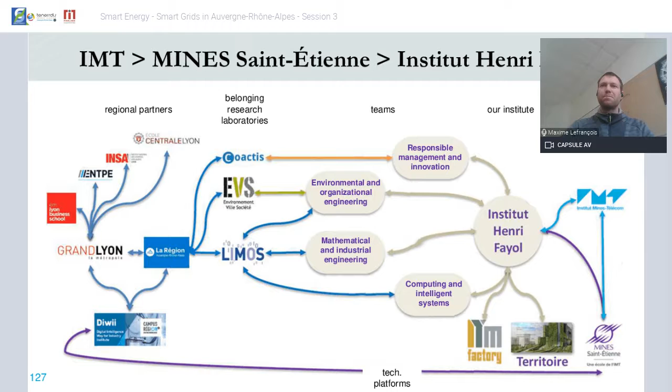We have also two local technology platforms. First, the territory platform. What we call technology platforms are labels and a platform where we can make research projects raise their TRL level until they are ready to migrate to spin-offs or created startups. This territory platform has one startup recently created called URBS, and I will present a solution of this platform in the next slide.

This territory platform is an innovation platform for, in general, territorial governance solutions. We are focusing on buildings, logistics, mobility, and environment. The goal is to support spatio-temporal decision-making in territories. We expose modular and evolutive applications that target heterogeneous domains, and on the environment aspect, we anchor on the United Nations Sustainable Development Goals.

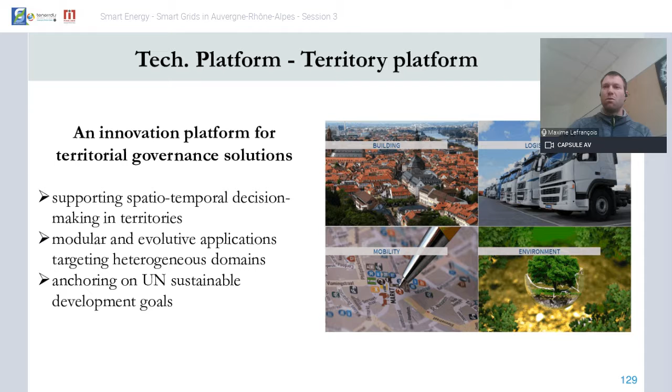One example of a solution that went through the TRL raising process is the IMOPE solution. It is built on huge data sets of indicators at the address level, including geolocation, cross-referencing, reconstruction, and reliability of territorial data qualifying the housing stock. It includes geographic information, cadastre, areas of interest, census of populations and localized income, land and tax files, energy data, and specific data.

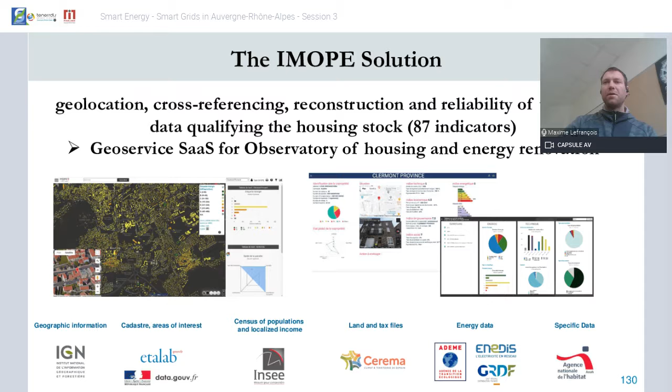The particularity is that the data is either obtained from open source or from partners, or reconstructed using AI techniques. There is a platform to visualize the different indicators. The goal of IMOPE is to help deciders plan large-scale energy renovation of buildings and housing.

We have a pilot that is actually our own building. We are located here at Espace Fayol in Saint-Étienne. This is not the historical site of École des Mines de Saint-Étienne, but it is the formerly Manufrance building, so the most ancient among us French people would know about Manufrance. What we have in this building, we ambition to make it a candidate pilot smart building for any new collaborative projects that we could be part of in France, in Europe, or even regionally.

So what we have is a web-based linked data building model for this. We have the control of our heating, ventilation, and lighting with, originally, Instabus. The installation was from 1994. Instabus was created in 1989, I think. And so now we have KNXnet/IP control on that.

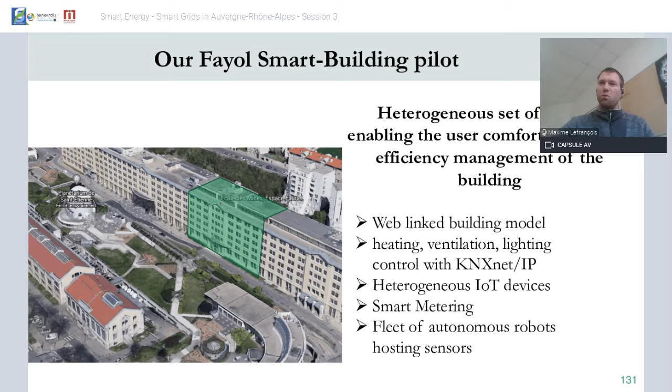We have access to our consumption data, obviously, and we are also working on autonomous robots that can move on the stories and make measurements in different locations, or connect to an isolated Bluetooth device and send messages, for example.

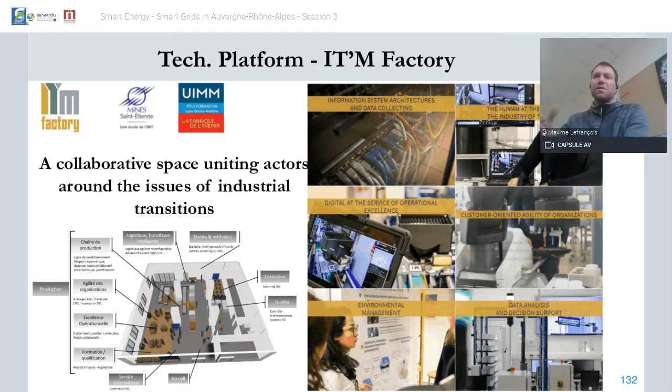The second technology platform that we have here locally is on the ground floor of our building. It's called ITM Factory, and it is a collaborative space aiming at uniting actors around the issues of industrial transition. So we demonstrate here some technologies that we consider the industry of the future, and we organize formations for SMEs to decide whether or not they want to move on in this direction in the digitalization of their company.

So some examples of collaborative projects that we worked on, and I give here a very small subset of these projects that we have. Mireille Batton-Hubert from the Applied Mathematics Department will give a focus on another project on April 1st, I think the last edition, the last workshop in this series.

I was recruited personally in 2014 after my PhD that was on applied linguistics, on knowledge representation for applied linguistics, on a Eureka ITEA project called SmartEnergy Aware Systems, which was quite ambitious. Its general goal was to design and develop a global ecosystem of services and smart things, collectively targeting the stability and the efficiency of the smart grid.

This project was led by ENGIE and involved 34 partners in 7 countries for a total budget of 16 million euros and 160 person years. It ended in 2016 and received the ITEA Award of Excellence for Innovation and Business Impact. And there are some follow-ups on this project.

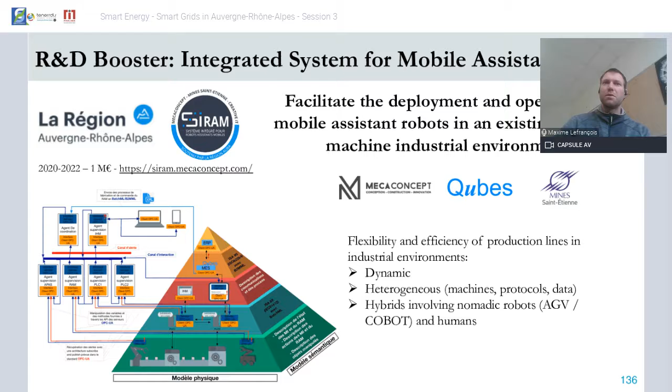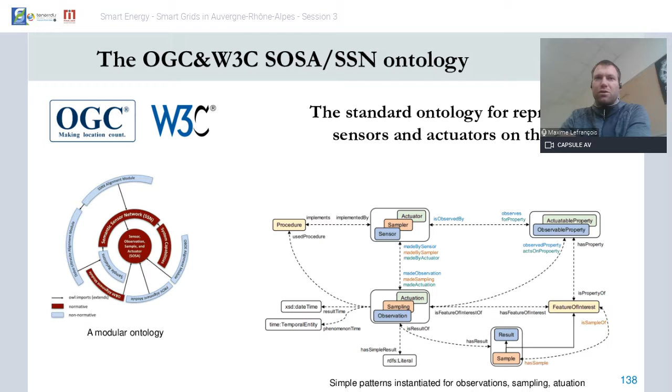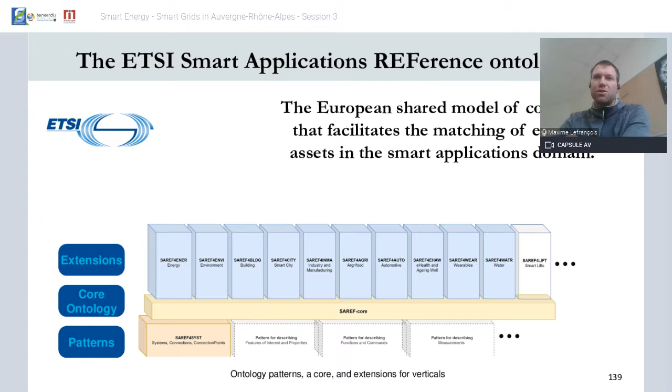In SAREF, we contribute to the development of the knowledge model development framework and workflow and the documentation portal. So even if we researchers don't have expertise in all these domains, we demonstrate how contributions can be taken from the ones that know the domain, and automatically generate a high quality knowledge model that is also automatically published, including the documentation.

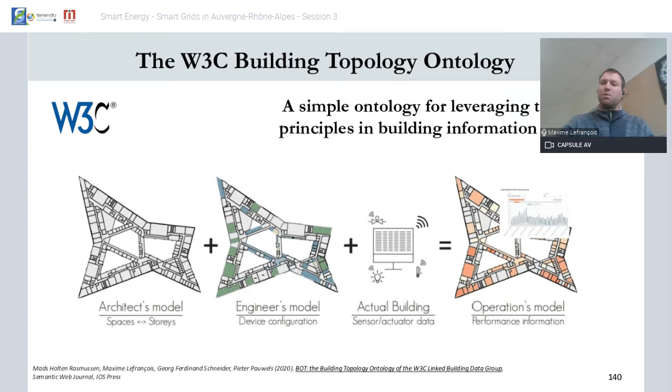At W3C, I was also co-chairing until recently a community group called the Linked Building Data Community Group, and one of the productions is an ontology called the Building Topology Ontology, or BOT, a simple ontology for leveraging the web principles in building information models. The idea is that with IFC, which is the standard data model for building information models, you would want to integrate the architect model, but also the engineering model and the actual building data and the operations model, like the actual sensor measurements that you can have, all on the web in a way that is compatible with BIM, so BIM level 3.

We recently recruited a new associate professor, Victor Charpenay, who was very much involved in the development of the Web of Things working group at W3C, which developed a set of standards for solving interoperability issues of different Internet of Things platforms and application domains. One key production here is the thing description model for smart things: a thing deployed on the web, no matter what communication protocol it uses, would expose properties, actions, and events that you can subscribe to. The thing description aims at enabling you to discover things and interact, knowing automatically how to interact with them. We are interested here in merging the multi-agent domain and autonomous agents on the web with the IoT using semantic web technology.

So I will conclude here. I aimed to introduce the Institut Fayol at Mines Saint-Etienne, a pluridisciplinary and complementary research institute, with a focus on AI research. We have technology platforms at hand and a smart building pilot. We have experience applying our research in different verticals, including smart grids, smart buildings, and smart territory, and we are also contributing to international standard development organizations in semantic interoperability for the IoT. Thank you very much, I'm looking forward to answering any questions you may have.